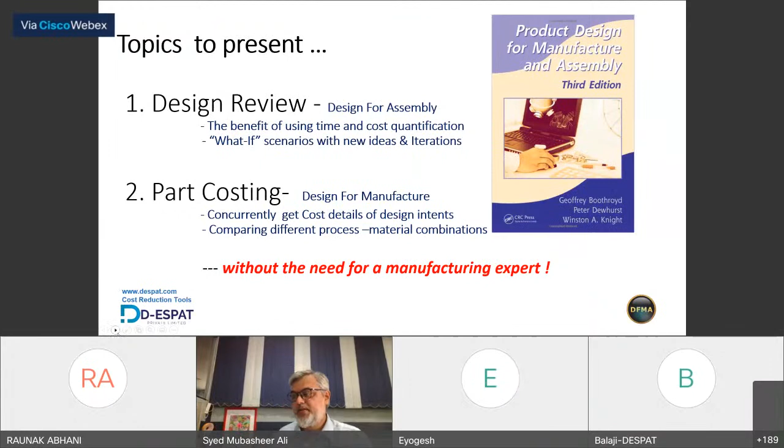Thank you so much. So here's what I'm going to do, and please do have a good look at this tool, this assembly. I think a sample of this assembly video is also being given to you. So for our session of understanding of these 2 tools, I've taken a sample example of a subassembly. This subassembly is called a position sensing motor subassembly that is used in a very large printer. This printer prints things like flex banners and so on. So it is a large printer mechanism assembly.

It actually is like a motor that moves back and forth on a guide rail. Okay, those guide rail that goes through these 2 holes. So what I've done here is I have got this bill of materials which is exploded here for the sake of our faster understanding, and a video that explains how this product should be assembled on the operator's table. So let me walk you through this video.

Here goes. So what's coming up, the blue color is the base in which that yellow color press fitted bush is inserted. The motor is followed with the motor set screw, the motor screws. The red color element is an electronic sensor, which is held in position by a set screw. These yellow color standoffs allow the green color end plate sheet metal component to be placed on top and positioned by end plate screws. That is a plastic grommet which allows the wires to come through. The cover is slid in and the cover screws are going to be fastened.

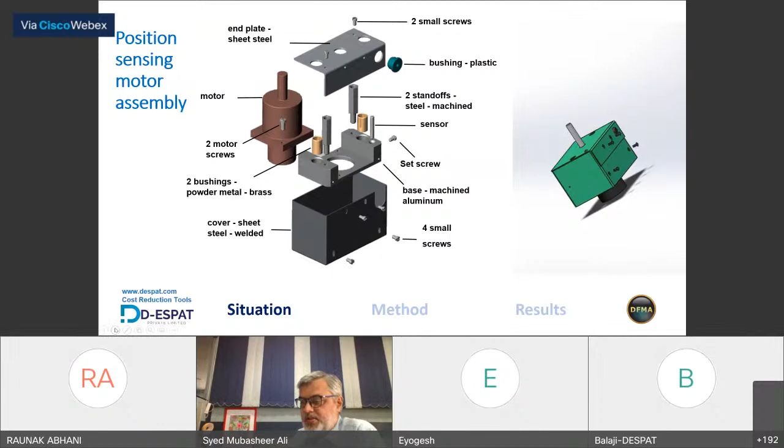I hope this video was explanatory. If you've understood that video, give me a shout out by saying yes on the chat box. Thank you.

So I have taken a few components from this product to bring your attention to understand our two modules to be validated today. So if you see from the video, these two components called the end plate and cover are sheet metal parts. And if you've looked at the video, these are the two components that form the enclosure of this particular product, right? Then if you see the remaining parts that I've highlighted here, except the base, this is not an important component for our conversation today.

The rest of the components, which is the end plate screws, these two numbers, these standoffs, and these four cover screws, what they are doing is they're trying to hold these two, end plate and cover, together. So they're giving the functionality of having them fastened and held in position. You understand? And remember, this is what the product looks like upon assembly, right?

Now, what I have as a question for you folks is, let us say today we are given a challenge. Our challenge is, guys, as a part of your project, please quantify this product design. Also, please find out if you can reduce the cost of this product. Please say if you can do some sort of a cost reduction or make this product more simpler to assemble. I have a question for you guys. How do you think you will go and quantify the functions of these different parts that I showed you in the product? Right? Every time we as designers, we always design a product to serve a particular function, right?

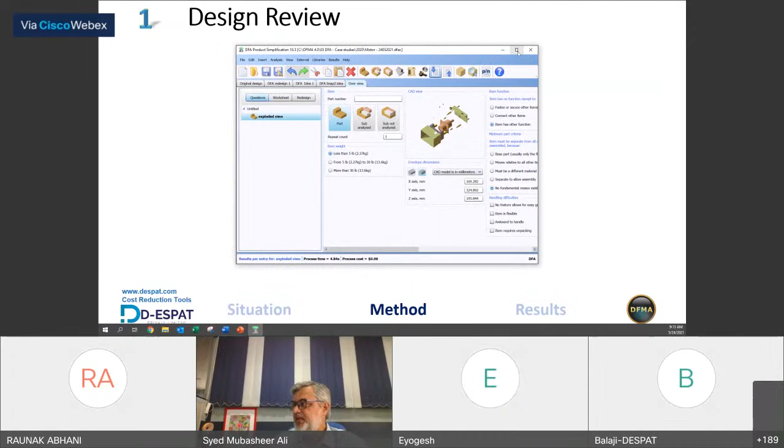So let me take you into that module and let me know if you can see my screen, which says Design for DFA Product Simplification. Guys, I know I want the chat box feedback, but looks like some people are only doing chat box feedback. I want you to get your attention on the screen also.

Wonderful. Okay, so here's what I have of that whole assembly that I've put up into the DFA tool. Rest assured, you're going to get a chance to look at this and work on this after these sessions are over, and we'll give you the guiding user manual and also videos to help you to do that. Okay, so now let's get some attention onto this screen. This is the Design for Assembly product simplification window. And the GUI is a very simple tool. Let me see if I can open up this.

Yeah, it does. So what you're seeing here is a CAD imported version of this bill of materials. Imagine if I didn't show you that video, and if I had asked you, hey, what do you think is the best sequence to assemble this product? You would probably need some time to plan out what should be the assembly sequence, right? So right now we already know what the assembly sequence is from the video that we have shown to you. So let us go and show you the GUI.

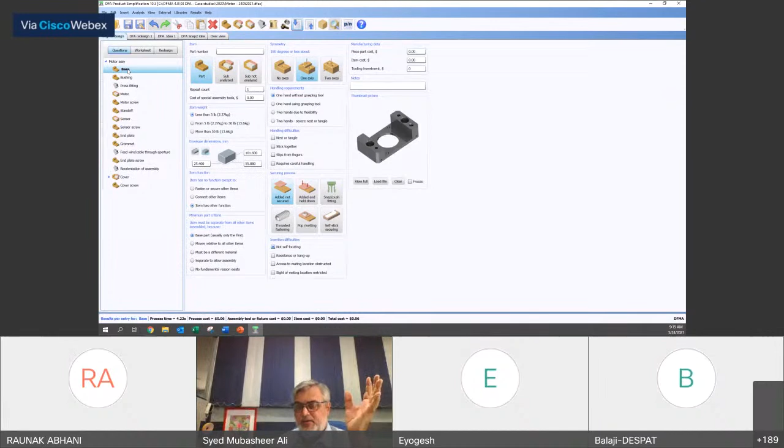The graphic user interface of the design for assembly window has 3 parts. One on the left hand side is called the product structure. What does product structure mean? Okay, one more thing is, if you remember, Balaji talked about secrets. If you see me repeating anything twice or thrice, make sure you note it down. You're probably going to get it as a part of the questionnaire on the 3rd day. It is an objective type questionnaire, but you need to know the answers to get it right.

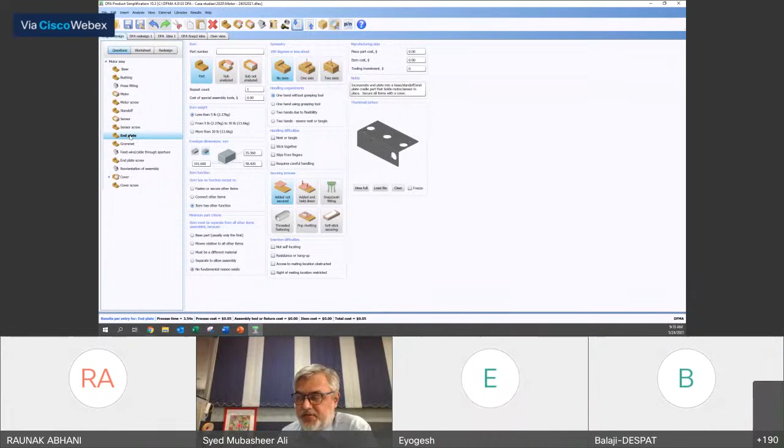So on the left hand side is this product structure. Now, what is product structure? It is the bill of materials in the sequence that you have to assemble this product. Can you see that this left hand side product structure has the same steps that we saw in the video assembling the product together? And for each item on the product structure, the right hand side is called the design for assembly question and answers panel. So this Q&A panel is the heart of the DFA analysis.

Ladies and gentlemen, you don't necessarily have to be an engineer to use this tool. If you're somebody who has a design idea, a product designer, an industrial designer, you have an idea of a product, you can use this tool even at a conceptual stage to get rapid feedback on your design intent. So the third part of the window, apart from the question and answers panel, is at the bottom here: results, which shows the process time and the cost associated with it, and also gives you the cost for the assembly and the item cost, which means each of the components in your design that you have put there.

Okay, now I'm going to do a few steps of this assembly, and if you already have the document from us which says the motor assembly, which has a 3D image, you can use it. If you don't have it, don't worry. Try to recollect from the video and help me to answer these questions. And I'll tell you some of the things related to this window as we get ahead. Is that a fair one?

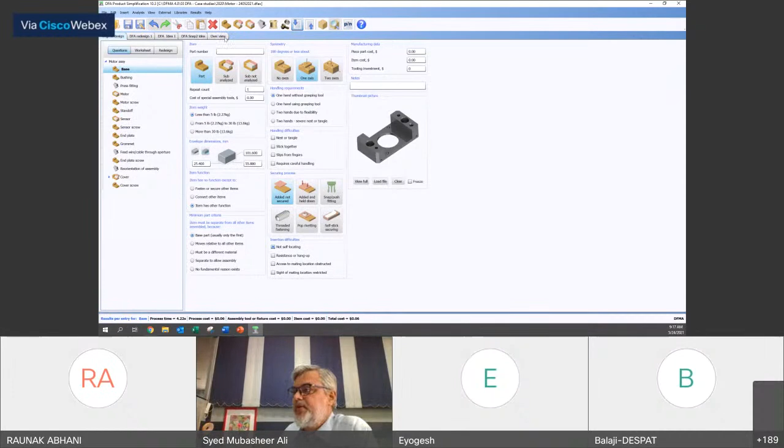Wonderful. So let me insert a new analysis. This is how I probably do this exercise. I'll come back to this finished one, so I put it there. So I'm calling this the motor assembly. I'm going to tell you what these steps mean.

So when I start out an analysis, whether you're going to make one prototype or you want to make a few hundreds or thousands of them, this is an important element called the life volume that you may want to enter in this window, because whatever costs you incur in terms of tools, special programming, consultancy time, and all other incidental costs will get amortized, averaged over this life volume that you want to manufacture.

So make sure you enter this, and it's important, gentlemen, please take note of this, because we're going to give you a singular exercise to be done. When you look at a product and do a DFA exercise for it, you must challenge looking at that product: how many such products should be made if a company has to be successful?

Depending on the magnitude of the product at hand, you should make some sort of assessment within your purview. For example, I've got this marker pen, Faber-Castell, in my hand. If someone asked me to do an analysis, I'd ask how many parts of this should I make. If this was a Montblanc pen, which is expensive, I'd look at it differently. So depending on the kind of product you have, you must make this assessment, or ask your sales or marketing team what the intent is to manufacture this product.

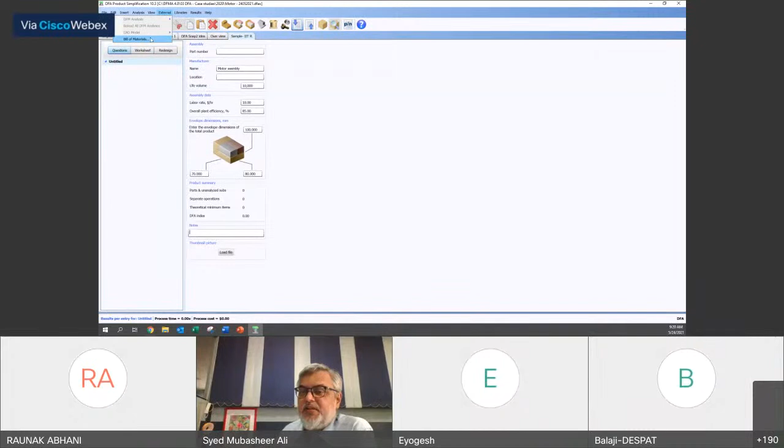This is my first entry, and this is an overview. Over the next few days, time permitting, I'll show you how to import a CAD model and import the bill of materials directly into the tool if you've already done the product in CAD. But today let's do this as an overview from a conceptual level where we have the design at hand.

So can somebody tell me what was the first part in our motor assembly? It was a base, right, if you remember from the video. So I've put that element as base. Notice I'm doing this from a conceptual design stage in this exercise, but I'll show you later the actually completed analysis for the sake of understanding this tool. Thank you, everybody. Understood? Yes. Let's get back to my screen.

When you're given this first element, this question and answer panel is up here, asking if you can define more details related to this component. First it asks: can you describe what kind of item it is - a part, a subassembly, or a subassembly you don't want to analyze? In our case this component is a part, so I'll leave it there.

Second, it wants to know the weight profile of your part - is it less than 5 pounds, a heavier component, or more than 30 pounds? Notice, ladies and gentlemen, that as I click these icons, depending on the selection, the question and answer panel changes.

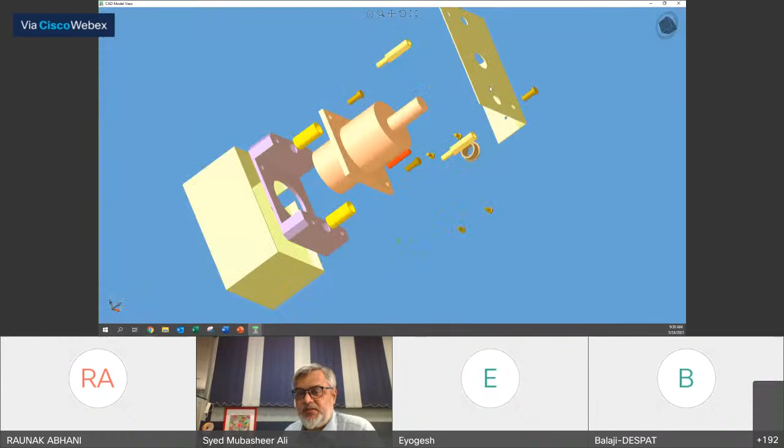If you look at this component, this is a base part, right? Actually, it's quite symmetric if you look at it from one point of view. But from an operator's perspective, if you look at these holes, you would like to bring it and assemble it in one way, so that only then he'll be able to pick and place it. There's also another hole here for the set screw. So the symmetry of this part is that he will pick the component and place it in one orientation, which is in his vision, so he can construct the rest of the parts inside that design.

So the symmetry for this part is that it has got no axis symmetry. No axis means one-way orientation, one-way insertion only. Does that make sense, Soumik?

If it was something like a ball bearing, it would have been a two-axis symmetry. If it was something like a screw, it would be a one-axis symmetry. If it's like a hollow cylinder, it would be a two-axis symmetry, and so on and so forth. I will answer some questions as we go ahead, but thank you so much for asking the question. It's nice to see a lively interaction here.

So what's the second part that we have to add? Everybody is very fast with the base part. Now let us see who recollects what the second part is. It's not the motor. Bush. Yes, thank you, Ashwin, it's the bush. Correct, the bushing is the part.

So let's go and add a part. As you can see, gentlemen, right now I'm doing this conceptually, but I can also add singular parts if I want.

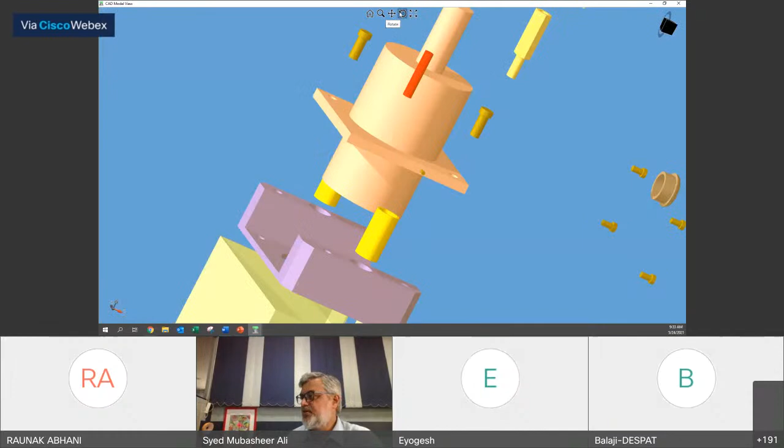You need to listen to me carefully now. This is the bill of materials. Are you able to see? This bushing is inserted into the circular hole. If you imagine the fully assembled product, which I showed you in the video earlier, the guide rail will go through this hole, pass through the bushing, and this whole mechanism goes up and down on these 2 guide rails.

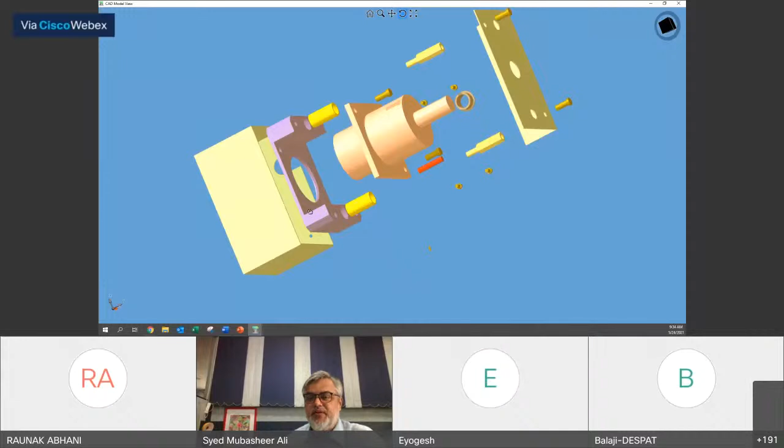This bushing is made of brass, this base is made of aluminum. The reason why the bushing is made of brass is because it's got some good frictional properties. That is why in the initial design they've had this bushing that is press fitted into this product.

Okay, now with that in mind, let us go and answer the questions for this bushing. So the bushing has a function. Now let's answer with a yes related to wear resistance. All right, let me go and answer these questions one by one in a methodical way.

We'll come back to this, Debashish, Yogesh, and Balaji. Please follow these questions. We'll cut, paste, and reply to them as we go ahead.

It is in dollars because this is the out-of-box solution. You can customize it to a different currency as a part of the reporting. Okay, Debashish, it's here - can you see this? Change currency. So we'll come back to that.

Now, is it a base part, this bushing? No. Does it move relative to other items? Absolutely not, because once you insert the press fit into the part, it will stay in position. It's not going to move relative to other parts.

Is the bushing required to be made of a different material? If you think about it, the base was made of aluminium, the bushing is made of brass. So the reason why it is made of brass is so that it has frictional properties that can be utilized for wear and tear. Let's go back for a moment and look at this 3D model.

Okay, look at this 3D model. Okay, now let me ask you a question.

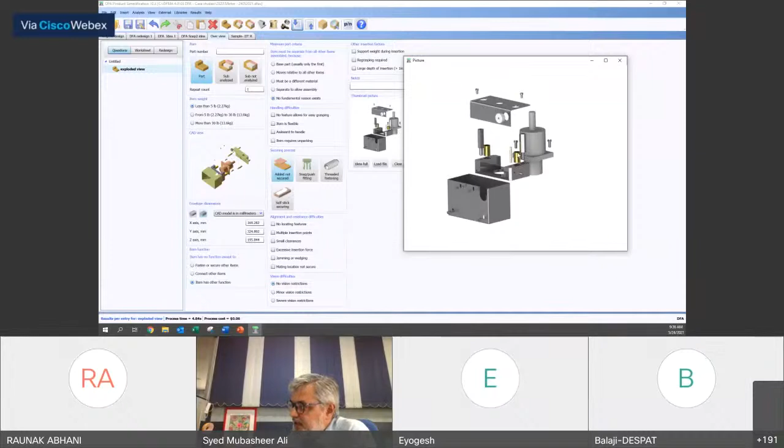I have been given a task to do product simplification. I know there are so many new materials available. Right now this is made of aluminum and this is made of brass, but is that the reason why it should exist? Can this product not work if I do the following? Listen to me carefully - if I machine the ID of this aluminum base as the internal diameter of the brass, won't the function still be satisfied? Can this assembly still work? The answer is yes.

So in order to achieve the functionality of this product, this is not a critical component that should be there. In that sense, even though it is made of a different material, it is still not required, not compulsory for the function to work. So many times we build a product which has such a secondary or tertiary requirement, but not necessarily aligned to the function of the product.

If you want to be a good DFMA person, you're going to critically give this kind of scoring, identifying the parts which are critical for the function and not critical for the function. Okay. So that way, ladies and gentlemen, this minimum part criteria says no fundamental reason exists for that particular bushing. What I'm saying is, even though the component is here in my design, when I'm doing my review, I'm identifying it as a component that is not necessarily required for the fundamental functioning of this particular product.

Now you come to the symmetry of this. I'll come to the fourth option. Hang on, I'll come to it. Thank you so much for asking.

Look at the symmetry of the part. Now you tell me, this is a hollow bushing, right? Like a hollow bushing like this. I'm not sure if you can see, there's a cap of my bottle. So I can insert the bushing like this. I can also insert it this way. So while inserting it this way, I can also rotate it 360 degrees and it will still find its way to insert, which means it is a component which has two axes of symmetry.

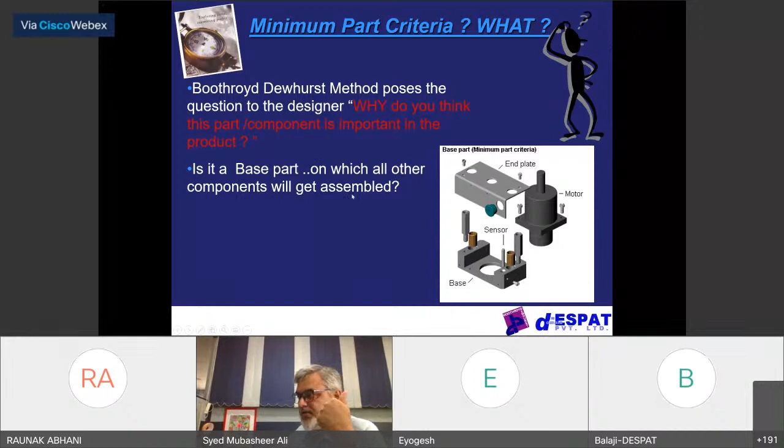Okay, now what does minimum part criteria relevance mean? So the Boothroyd Dewhurst method says to the user, based on the user's perception, why do you think the component is important for the product? This question is something as a user, your perception. So there are 4 different attributes to this. One, if it is a base part, like in this case, on which the components are assembled, then that is option number 1.

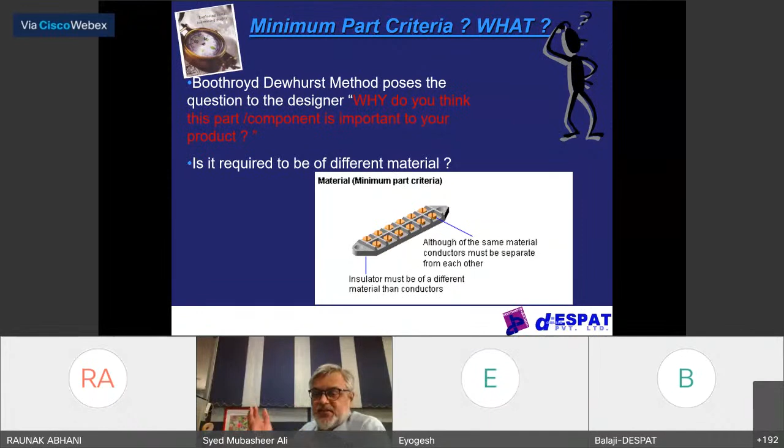Do I need these 2 separate wires with this insulation for this product to work? Yes, I need a positive and a negative wire, then only this product can work. So something like this should be compelling, where the material has to be different. So electrical insulation, thermal insulation, these kind of attributes. Understood? If it doesn't satisfy this, the third thing is it should be probably a component that moves relative to other parts, either more than 360 degrees of revolution or a translatory motion like up and down, where translatory motion is required for the product to function.

Other plastic bushings used above the motor in the assembly? I didn't get your question, Avantika. You want to frame that one more time? See what I'm doing, Avantika, is I'm doing this demo as if I'm reviewing an existing old design. Coming back for the newer ones, I'm going to show you as we make the improvisations. Okay, let me come back to that.

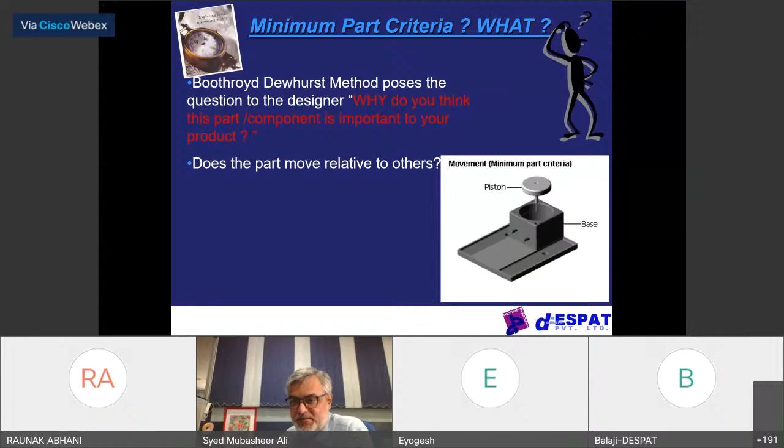And the 4th attribute in the minimum part criteria is, should the component be separate for assembly purpose? These are the 4 different criteria which classify as the minimum part criteria. One is the component should be a base part. 2, it should be made of a different material. 3, it should be moving relative to other parts. 4, it is required for assembly.

What I mean by required for assembly, let me give you an example. The cylinder head of your engine and the cylinder block are both made of the same aluminum alloy. But the cylinder head is made separate so that you can put the piston, connecting rod, gudgeon pin inside the cylinder. Otherwise, if you have it as a singular part, you'll never be able to put those components together. So something like this makes it a criteria for assembly. So these 4 categories form the minimum part criteria question.

If it doesn't satisfy this, then the remaining parts should be viewed as candidates for elimination, as we call it. Under this, as you've already seen, one is fasteners: nuts, bolts, rivets, screws, washers. Second one is connectors, which is conduits, cables, wires, tubes, ropes. And the last one is redundant components. For example, there was a hole. To cover this hole, he's put a plate and put these 4 screws along with nuts and washers. Can we find a way to make it simpler? That is what we have applied as a thinking for the bushing.

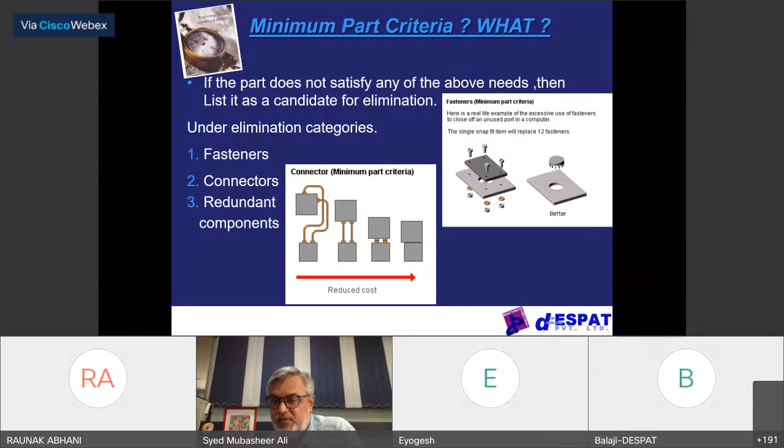Understood? Say okay or understood or a yes in the chat box, please.

Now, let's go back to this presentation for a while. Now, you understood that the motor has 1 and 2, both options relevant, but we are taking the more important criteria for the motor. Now, the next question is, sir, what is the importance of minimum criteria? Where does it impact? See, when you select this option, this gets reflected in what we call the design for assembly index.

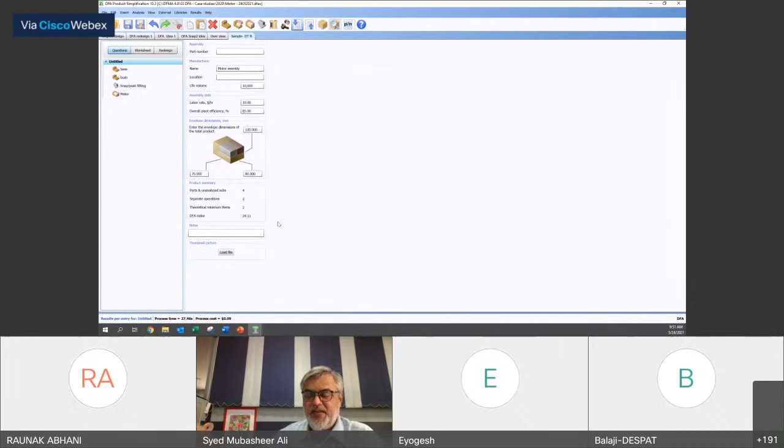See, a design for assembly index is a measure of comparing your design to the world's best practices that is a part of our system. And for the actual time that you have for assembly, for all of these steps that you're carrying out, it gives you an indication of how much it is compared to the world's best practices.

Now, can this be 100%? No. But what is it that is a thumb rule for me to look at? Nothing like that. You make a comparison of your design as you build your product structure, you get feedback. As you keep making improvements, you get different numbers. That improvement of the old and the new, which uses the world standard as comparison, is your reference of improvement. I will explain what I mean as I show you the overview in the next 4-5 minutes. So let's come back to the motor.

I hope we understood the importance of the minimum part criteria. This is very critical for success of your design for assembly review, ladies and gentlemen. Okay. Next, if you look at the symmetry of the motor, the motor has a square-like base. So you could probably rotate it about 1 axis and insert, but maybe there's a challenge with the motor wire. I don't know. So if that is the case, I will say no axis, which is preferable.

What would be considered a good enough index? There's no reference of a good enough index. For a commodity, let us say a computer CPU, the DFA index would be something like 3 to 5 or 7%. For a mechanical enclosure, it could be 10 to 15%. That doesn't matter. From that existing design review, when I make an improvement by a few percent, that is what is important for success. It's relative in itself. Doesn't matter.

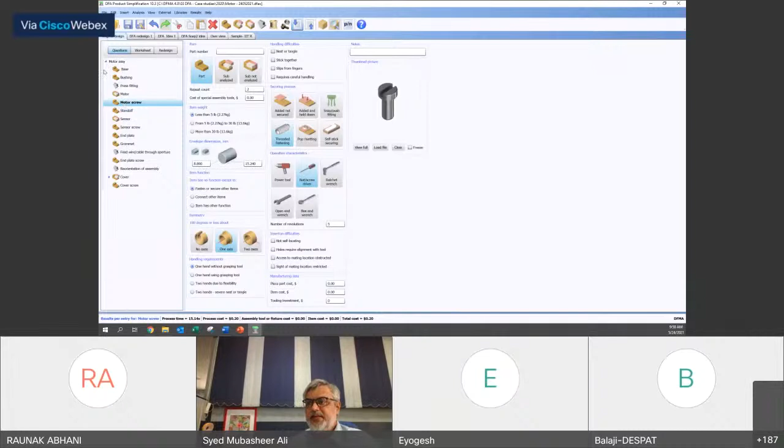So what I've done here so far, ladies and gentlemen, is I have captured these steps of our activity. The only difference that you're seeing in this completed analysis is I have also added the photo of the component here, and I have used the product structure to build this whole hierarchy of the components in my design. Now the next stage is when you have such key steps done, you can review this design.

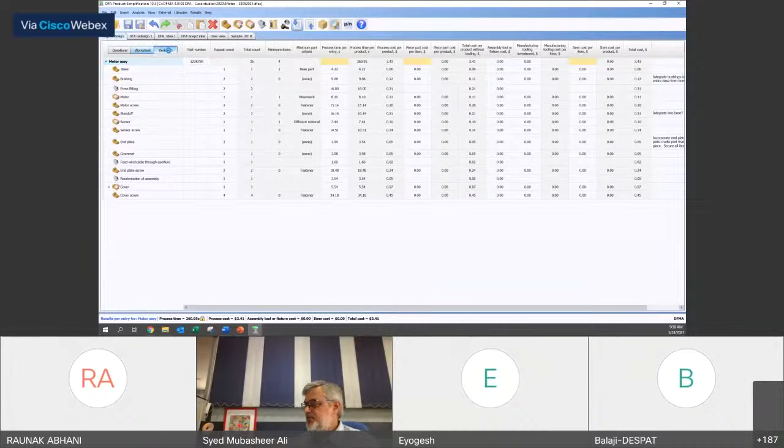Are you able to see my screen? You can review the design like how industrial engineers would do. But more importantly, we have an interesting feature in our software called suggestions for redesign. The suggestions for redesign is a window that categorizes all of the entries that the user has.

Yes, Anmol. What I'm saying is, Anmol, first you build your product structure in the sequence that you want to carry out your review. Like in this case, I have done the assembly steps of this particular motor assembly. Right now, you see, I'm doing an assembly order sequence. For example, somebody could give you a challenge: in the field, like say maintenance of a car, the disassembly by the mechanic is different. So you can do a disassembly sequence also if you like using this tool.

Right now, we have done an assembly sequence of this motor assembly, which forms the full product after you put all of the parts together. What I'm going to use this tool for: I want to use the DFA tool to help me find out where the opportunities for improvement are. I can do that by looking at my product using this suggestions for redesign window. Yes, the hierarchy of the assembly can be altered. The cost will not vary unless you answer the questions differently. Order does not matter. Order is for us as users to understand why we are doing this order.

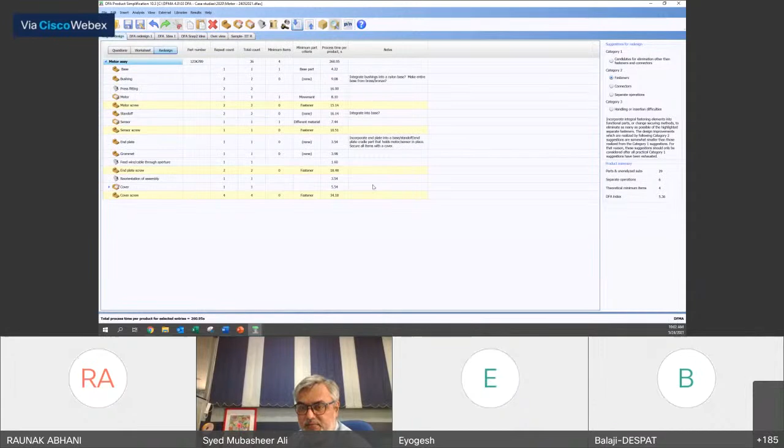Now, if I am a part of a design team that has been entrusted with the activity of doing product design review, I will take my attention to the large time contributors in my design and go challenge and find out what is it that they are doing. Is there an opportunity to reduce and so on and so forth? Shall we do it for the cover screws now for a minute? Yes or no? Okay. So let me park this window here.

Let me close this. Let me go and show you that this is the method that we have done. We had a situation previously. Our situation was we have a motor and I brought your attention to these parts. Now I'm showing you the method where I've done this in the DFA. Now, before I go back to this, let us look at this and ask, what are we doing in these few parts? Now that you have done a DFA review, let us focus our attention on these 4 parts. Just imagine that we've answered the questions for all of these parts also. Okay. What I showed you was a quick demo of the DFA tool.

Now, if you look at this part, you'll see that this end plate, one component, and this cover, the second component, is here. I've also put these 5 other parts, the end plate screw, cover screws. Let us start looking at the cover screws. What is the cover screws there for? The cover screws was there for holding the cover in position, correct? What is the cover there for? Well, this is working in a hazardous environment, so we need a cover to protect this product.

Okay, is the cover the only component that is protecting? No, the cover is protecting from these 4 sides. The end plate is protecting from the top. So in order to do the act of cover protection, we have these 2 parts, cover and the end plate. So is the end plate held directly? No, it needs an end plate screw. Is the end plate screw directly held? No, it needs a standoff.

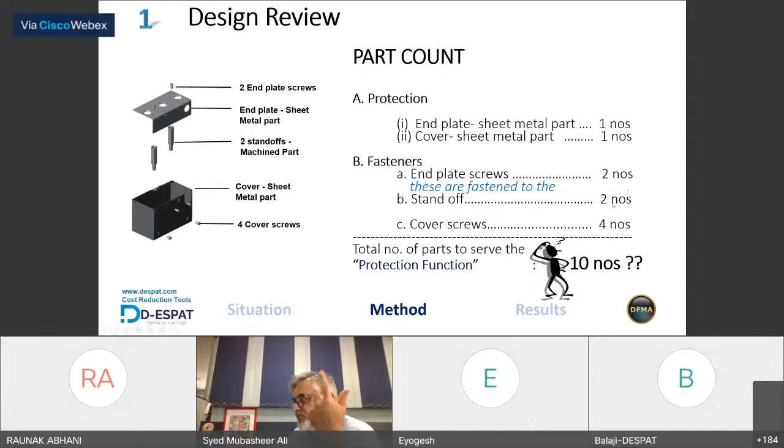So if you look at these 10 parts that I have grouped together, I mean, see, the DFA analysis doesn't happen so easily, but just in the interest of the learning, I've grouped them up to show to you. And I've categorized them into 2 large categories. If I look at these different parts, for the act of protection, we have 2 sheet metal parts, the end plate from the top, the cover from the bottom on the sides. And in order to hold them together, I have end plate screw, cover screw, standoff. Totally, I have 10 parts to do what? To do the act of protection. Come on. This is what I've been able to identify.

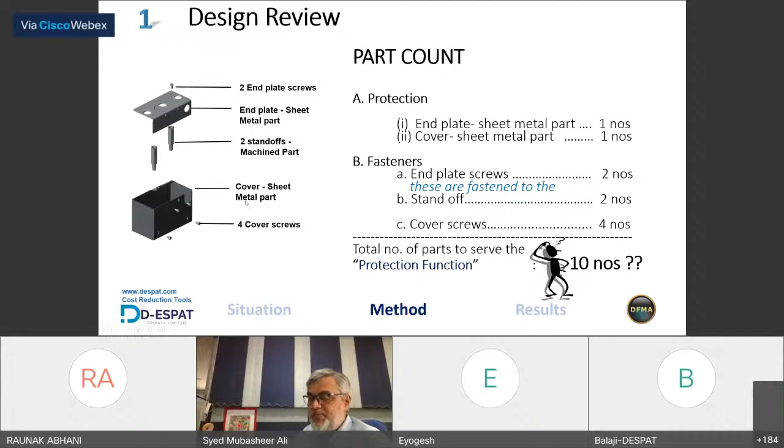And in that, the cover screws is taking about 34 seconds. Now, yeah, we can reduce it. That's why we're going to use the DFA tool. What I'm showing you is the method to this madness of how to do this reduction. So, and remember, do you remember this image? This is what the product looks like when it is assembled, right? Now, ladies and gentlemen, I have some challenges for you.

especially, gentlemen, I'm not looking at you as academic students alone. I'm looking at somebody like you who's going to go tomorrow into an industry and be a part of a design team, where you will be faced with this challenge that when you propose a new idea, your boss, your team member, yourself, are going to say, how am I going to quantify this idea?

If you're part of an enterprise, how do I tell my manager, my teacher, my faculty head: give me the time and the tools and tackle and lab so I can go and validate my new idea? Who should I look out for to help with this validation? Many times, millions of dollars are lost because this ability isn't there. I had a good idea, but there was no time, the project was too heavy, and I forgot about it. Two years later, I realized we lost so much money by not doing that revision.

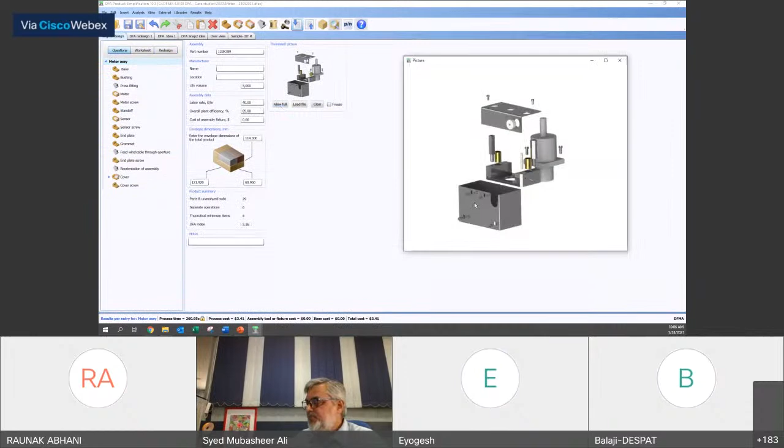When I looked at this component, which had the largest contributor, I challenged it. I did a design review with my team and found it's possible that we can combine these two parts into a singular part, which could look something like this. As I said earlier, this isn't necessarily a CAD image, it could just be a sketch I drew on paper while having coffee. But now I have an idea.

What I can do is use the DFA tool to make a quick review of my old and proposed new idea.

Just give me a second to generate the report. Sorry, not able to see my... Yeah, here it is.

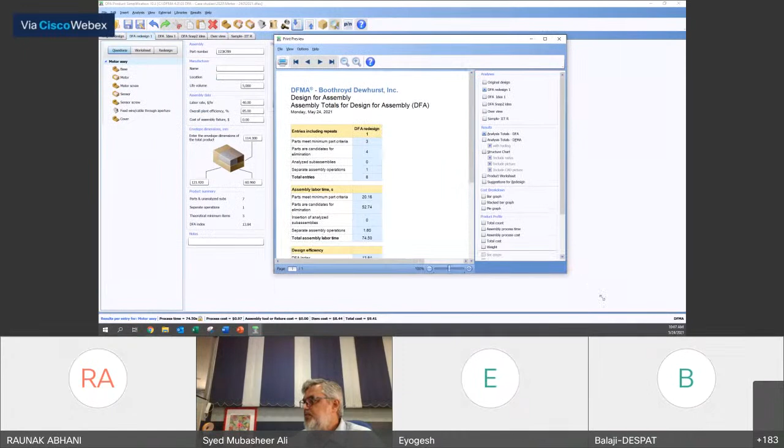Let me maximize this old and new design. Gentlemen, this is our old design and this is our proposed new design. We haven't made a CAD model, we've just got an idea, and from that idea I'm able to create a potential review.

Let me quickly look at some of these attributes. The old design had about 36 different entries in the bill of material or product structure; a potential new idea could just have 8. The old design takes about 261 plus seconds of assembly; our potential new idea could have 75.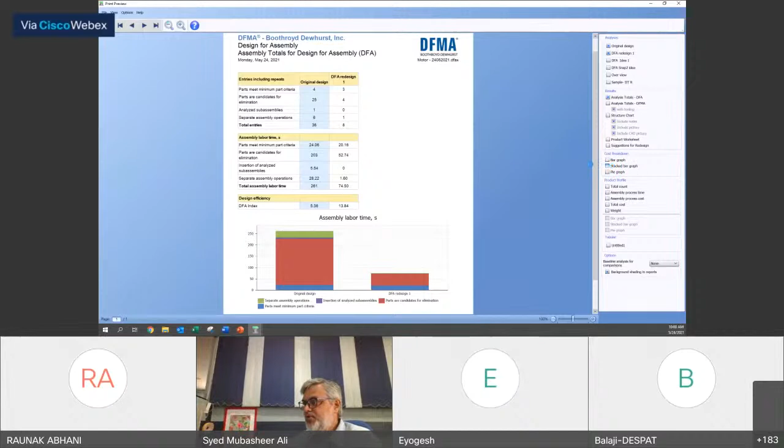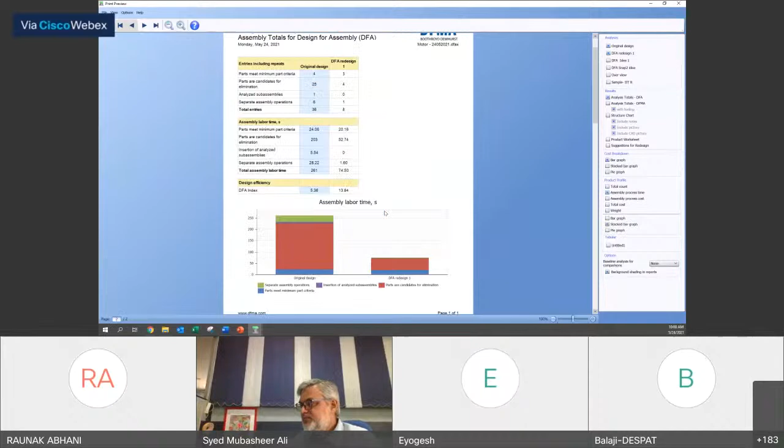I can look at different attributes around this particular product and generate different reports around this. Let me come back and show you the old and new ideas, and look at different other elements of the same product. That's a cost breakdown of my old design and my new design, and this is the process time and process cost associated with it.

Now, what does this mean? I'll tell you in a minute. I want this as a bar graph, not as a stacked bar, it's easier to...

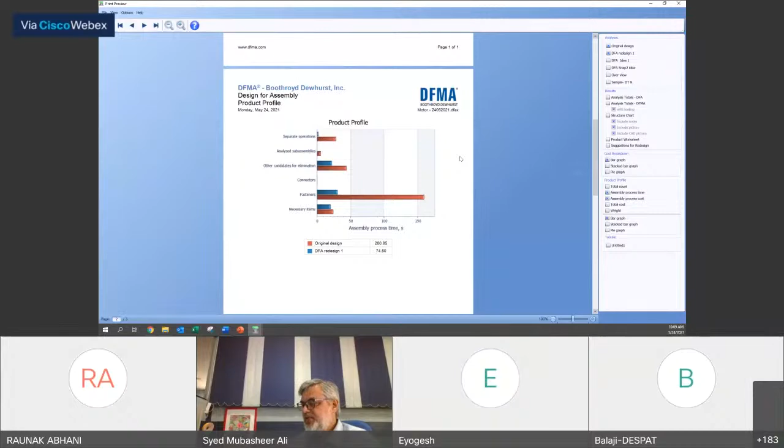What I'm showing you is the latest version of the software, so you have access to this version of the tool. Are you able to see this graph, where I'm talking about the product profile and the assembly time? Let me just maximize it a little.

Now, if you look at this old design, ladies and gentlemen, the overall time for your assembly in the old design was about 260 seconds, of which the fasteners alone were contributing more than 155 plus seconds. Those components which the user, through the minimum part criteria questions, has answered as necessary, are only contributing less than 25 seconds.

With our proposed idea of making a singular cover where we get rid of the standoff, the end plate screw, and the cover screw, we have the potential to reduce the fasteners to something like this, where the fasteners will take less than 30 seconds, and the overall design time can be reduced to 75 seconds. This rapid feedback of your design intent is what the DFA tool helps us to do.

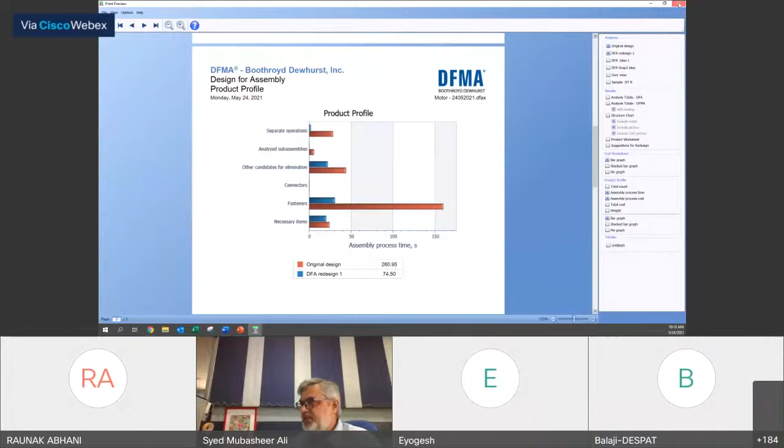Let me generate a couple of ideas for you and talk about those in a minute, in the interest of time. Now, do you remember this motor?

Do you remember the motor's video? It had 2 screws. Let's say if you wanted to make it a foolproof design, wherein in the base you make one chamfer here, so that the chamfer also has the motor. So when you place the motor, only the chamfer can mate with the chamfer of the base, so you can use one motor screw to insert it. If I have an idea like that, how do I validate it?

I can make a copy of this. I will make a paste of the new design. I'll rename it, calling it IITPR Idea 01, in which I'm going to reduce these motor screws from 2 screws to 1 screw.

Now you may ask, sir, how is that 1 screw going to look like? What is the engineering drawing going to look like? What exactly will be the details? You do that engineering part later. But when you have an idea like this, can I get feedback for my potential new idea? That is what the DFMA software can help you to do.

So I'm going to do a quick review of the old idea, new idea, and the IITPR idea, which I just created in the last 1 minute. You see this? The old idea, the fasteners were taking about 61% or $2 cost. Fasteners in the new design is going to be 41%, 0.4. In the IIT design, it's going to be less than 33%.

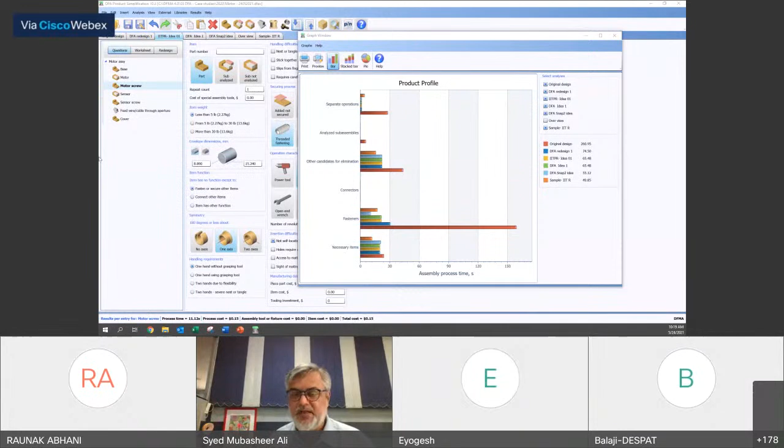So gentlemen, I understand there are a lot of questions, it's nice to see these questions. I'm not sure how to answer them right away, and I'm running low on time, so can I go on to the next part? Yes, you can use the software for designing anything - Formula cars, or anything. We're using this for our own electric tractors that we're doing. Okay, time up.

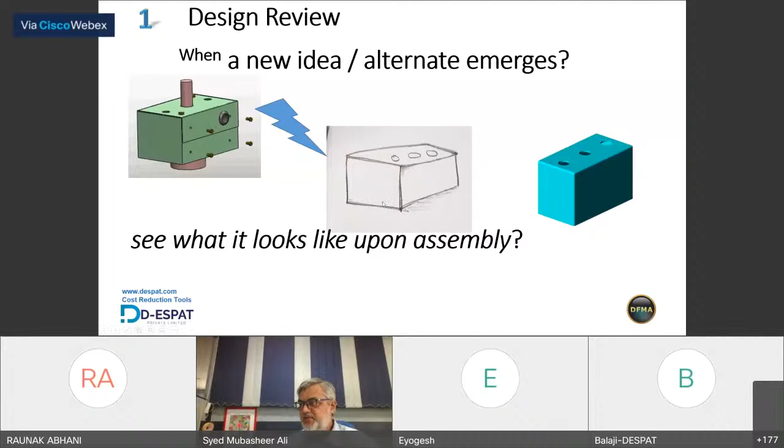Now let me take you to the next part of my story, right? Remember, we have this design. I hope some attributes of the DFA tool have come through to you, which is evident from the kind of questions you're asking. Now, I have this design, and I want to show you the next part of this process, which is focusing on making the parts in the design, for which we will use the design for manufacture concurrent costing tool. With this tool, you can estimate the part cost and also get a very detailed manufacturing review of making that part. So for that, I've taken into consideration this cover - it was something we just now did as a potential new idea. Can we do that?

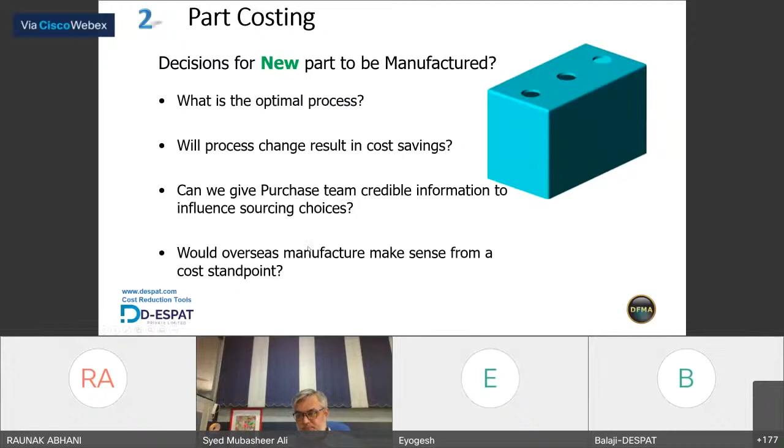Another challenge for procurement people is, should I make this in India? Should I make it in Pune? Should I make it in Chennai? Should I do it in China or Vietnam? So this kind of overseas manufacture review of costing from a cost saving perspective, these are some challenges.

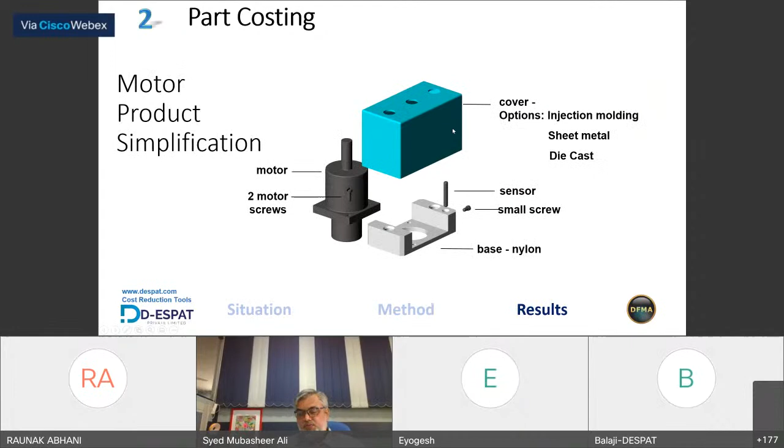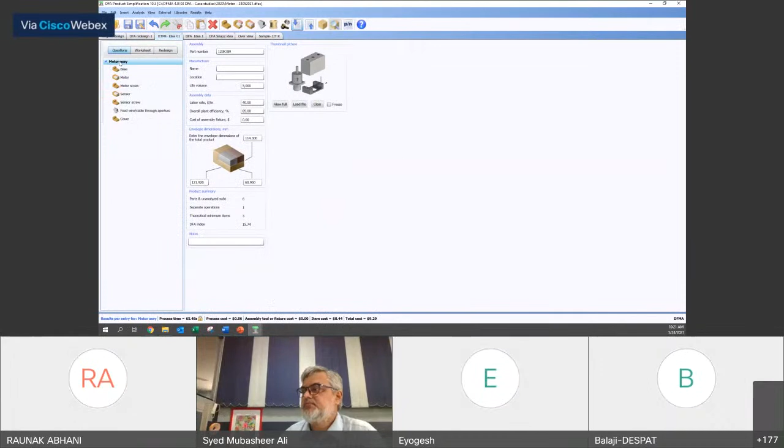I can right click in the DFA tool. I can say do DFM analysis, create a new. DFA and DFM are true concurrent costing tools, so the data from one to the other can be interlinked. So I'm taking the data from the DFA and creating a new analysis in DFM for manufacturing this part. When I do that, the data related to the cover, with the quantity, the name, the geometry details, automatically comes into the software.

Again, ladies and gentlemen, in the DFM tool, if you have a CAD model, you can import a CAD model. But right now I'm going to do a conceptual. I'll show you CAD models later. Let me maximize the screen. So this is the look and feel of the Design for Manufacture Concurrent Costing 4.0 tool. This is the latest version that we have.

When you give the overall geometry of the part, you select an envelope shape and you select this process material icon. What happens, ladies and gentlemen, is you get this process and material selection chart. If you select a process, it'll automatically show you the compatible materials for such a process. Okay, so right now, in the interest of time, I'm going to do this.

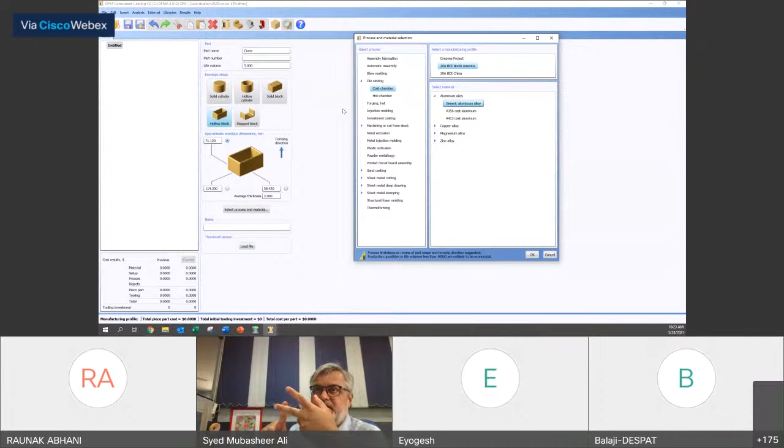Imagine for a moment, this guy called Syed is part of a company. He has got a design from his design team, which has been validated as a good design, an improvement of the cover. So a 10-part cover has been made by the design team into a single-part cover. Now they want to find out, can that cover be made in casting? Can it be made in casting but in China? Can it be made in sheet metal? Can it be made in plastics? This is what I'm going to do in the next 5-10 minutes.

So let me take this cold chamber die casting process. When I selected aluminium, it is saying, if you're taking a quantity less than 10,000, it is unlikely to be economical. Remember our life volume was 5,000, so it is giving me a warning. If you actually manufacture this, the costing may be on the higher side. So the DFM tool, based on the knowledge in its database, will give you rapid feedback on your design intent.

Let me create a stupid situation for myself. Let us think that this guy Syed has done a good design, but he's taken a very large thickness for this component. Can you see I've typed in the value 12?

Hello? Am I only talking to myself? Thank you. Thank you.

Okay, imagine because of some human oversight, some error, this was given as 12. I select this process material selection chart. I select the same cold chamber die casting process. I'll select aluminum. Can you see the warning? It is saying, you've selected a section thickness greater than 11.93 mm, it is unlikely to be practical. Okay, so when I make errors like this, I'm just arbitrarily making a 0.25 mm thickness.

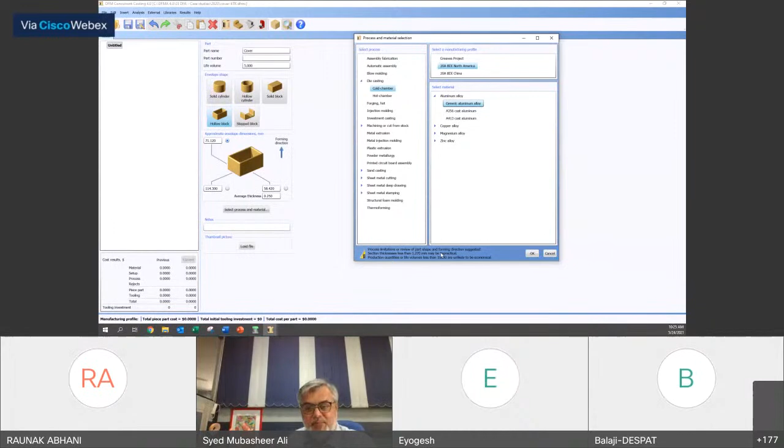If you have less than 1.25, it may be unlikely. So imagine if this was a problem that comes at the production stage, gentlemen. Right? So here in the virtual world, even before I went and designed my CAD part, I have a rapid feedback of my design intent. Are you getting it? This is the strength that DFMA is contributing to the design world, without having engineers looking for manufacturing experts, getting a rapid feedback around their design intent.

And nevertheless, in the interest of time, I'm going to run this a little fast, so that at least I complete the DFM before the 11 o'clock session. So I know I have a 12 mm problem, but I'm still going to take this value just in the interest of this demonstration. I hope that is okay with you. I know that the problem is my quantity is less than 10,000. I know that the problem is we have 12 mm, but I want to review it today. Tomorrow when I go to office, I will talk to my design head, Dr.

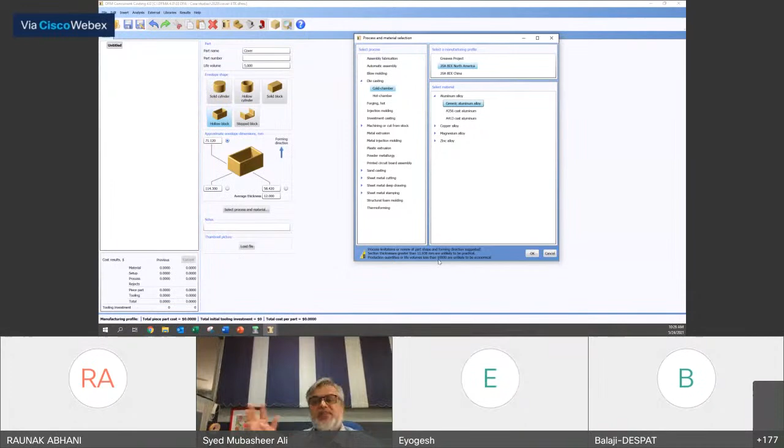Do we have our vendor who can do this part for me or not? I can do these kind of discussions later, but I have this warning already come up, which I will take a note of, and I'll say, okay.

So ladies and gentlemen, what you see here is the process chart automatically generated for the casting process for me. And for each element in the casting process, the data is generated on the right hand side. This is the proprietary IP of our software, which automatically generates it. And what comes at the bottom is the cost impact of your design intent, which is the material, setup, process, tooling of making this part in aluminum with the cold chamber die casting process.

This is the breakup. Then what will be the cost of tooling? It is automatically calculated from the entry that we have given, this overview, which has to be perfected. Now it is conceptual. Remember, you have not given accurate data. The software has made estimates. Another important thing I'd like to show you is this data, which is generated in the DFM, ladies and gentlemen, can automatically come into the DFA tool. What is the relevance of this?

Imagine if my design team is in the US. Manufacturing team is in, say, Pune, Chennai, China, Vietnam, Malaysia. If the DFMA suite is installed on the same server, and my design team, DFM engineers, the vendors, the suppliers, the manufacturing have access to it, then while they're doing these reviews, what is done by one team can automatically be seen by the other in their relevant windows. So that's how we are helping companies world over squeeze their product design cycle by over 50%. Okay.

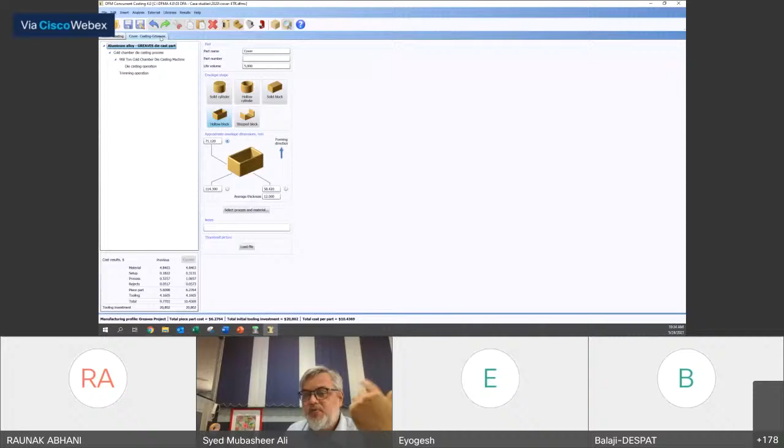So far, I have done 2 iterations of making this component, one casting using a US default database, one using our India customer database. Now let me make another copy and I'll rename this for, say, sheet metal. What if I were to make this component in sheet metal? I'll select this process. You see there are 11 sheet metal processes that are part of our database. Let me select this turret press.

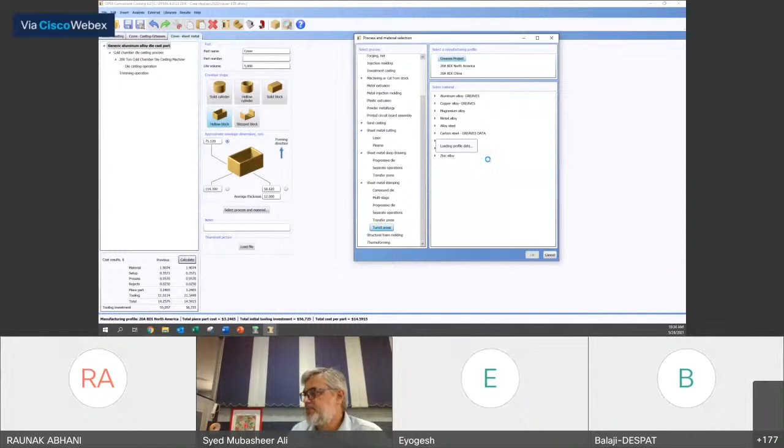Instead of aluminum, let me take a different material. Again, I'm taking a different database here, and I'm going to say OK. So it's going to switch the data from my previous casting to sheet metal. I say yes.

Ladies and gentlemen, do you see the error on my screen? It is saying, boss, Mr. Syed, you've selected a dimension, a thickness of 12 mm, and we don't have in our library a turret press large enough to stamp 12 mm. Gentlemen, imagine for a moment, you did your design, you did your prototype, and let us say at the production stage this problem comes up, what would happen?

Here you see in the virtual world, I've not even designed the CAD model. I just have a conceptual idea for a component. I'm able to get feedback like this. Again, DFMA is not pure science. It's a set of guidelines that have been documented over the last 40 years. So it's not like an ANSYS tool that says, oh, you've not done the mesh properly, you can't do a finite element analysis. These are just warnings. You can say this is not possible, but you can still say okay, and it'll give you the best estimate based on what it has.

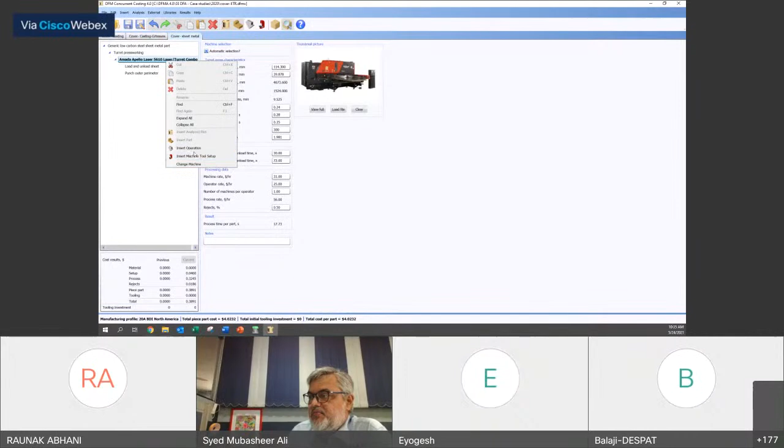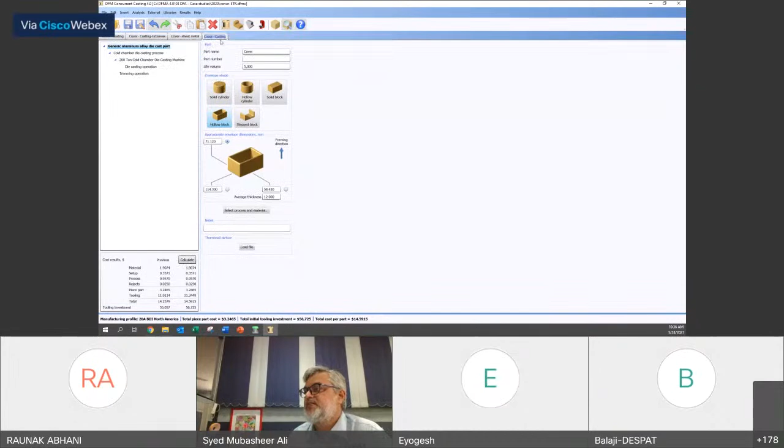You see these machines now in turret press, all of them are showing in yellow. What does it mean? None of them are capable of stamping a 12 mm thickness, but nevertheless, it is taking one of the largest machines and giving you an estimate. Okay, so let me just do one more in the interest of time, and I will rename this as plastics. These are all file names. As you can see, in one DFM file, I can have multiple iterations. And I can have different commodities. When I say commodity, it means a different combination of process and material.

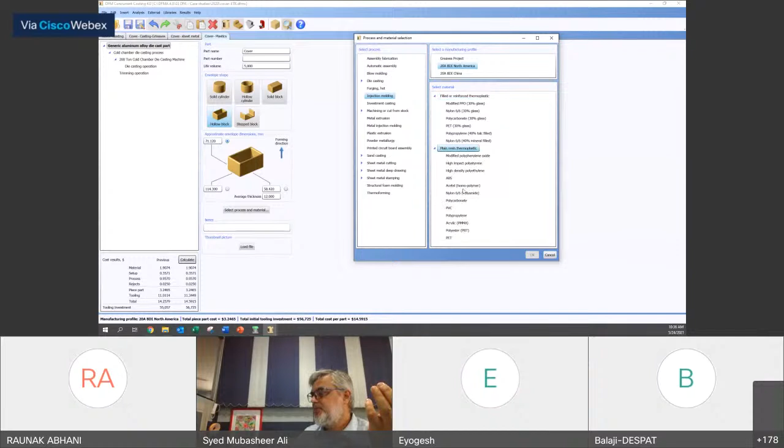So let me take injection mold, and let me take maybe a thermoplastic. ABS is a good engineering plastic. I'll select that. Again, it is showing some warnings. It is saying if you have a section thickness greater than 6.3, it's unlikely to be practical. You have a volume less than 10,000, you have only 5,000, it's unlikely to be economical. Nevertheless, I'm doing an apples to apples comparison here. Let's say okay.

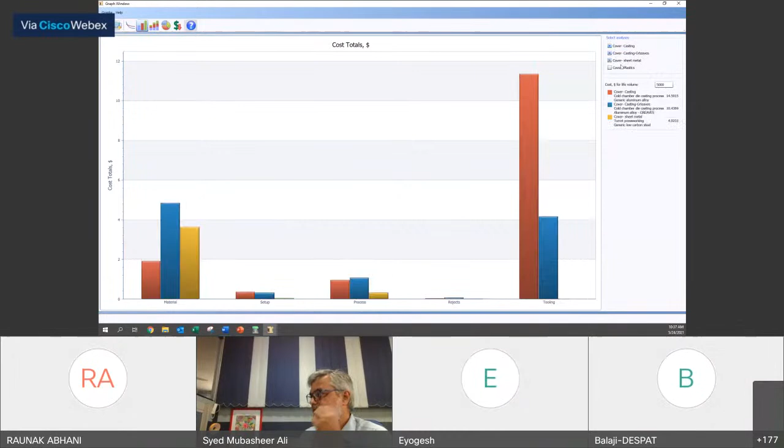So do you see that in about the last 10-15 minutes, one given model we had, and we've done 4 different iterations of commodities. Since there are too many numbers here, let me report all of them on a single dashboard. Are you able to see my graph? Okay, so at this moment I've done 4 comparisons. So for a given life volume of 5,000, the material, setup, process, and tooling for each of these processes.

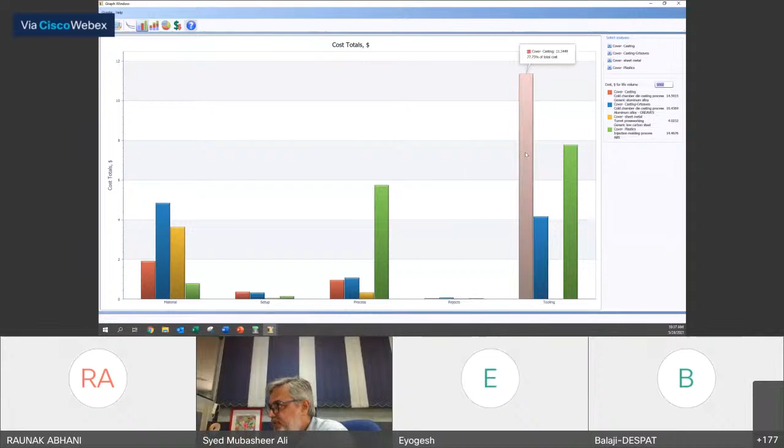If I go on a process, it is showing you how much. The red color refers to the die casting with aluminum. It's saying 75% or 11 rupees is the cost of the casting. For the blue process, it is 4 rupees. There's no tooling for sheet metal. That's why it is almost 0. And the green color is related to plastic. So I can see a breakup like this: material, setup, process, tooling, or I can see it like a stacked bar graph. So the blue color represents tooling here. I can look at it as a pie graph.

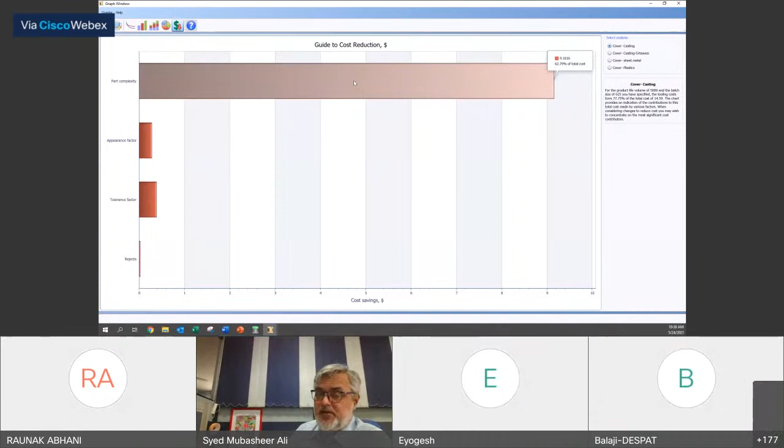If you're a manufacturing expert, you can look at this feature called cost reduction guide. What this does is if you're a manufacturing expert and you want to tell the design team, hey guys, you've done a very complex feature. You've selected a very odd thickness of 12 mm, and that is contributing to the cost of manufacturing this part. This is a tool that manufacturing experts use for having a discussion with their design team.

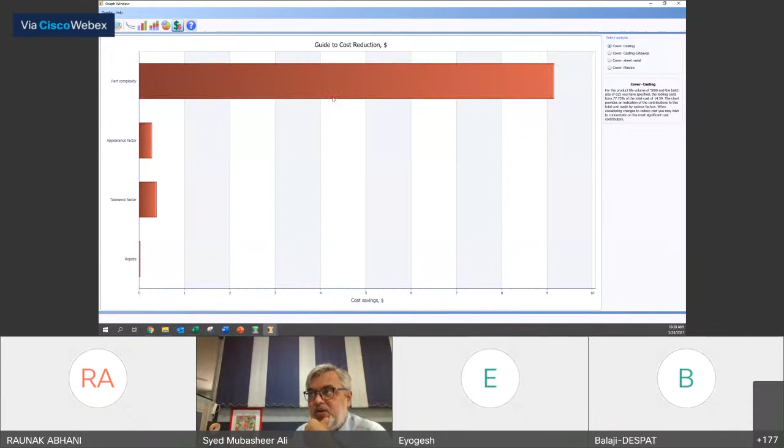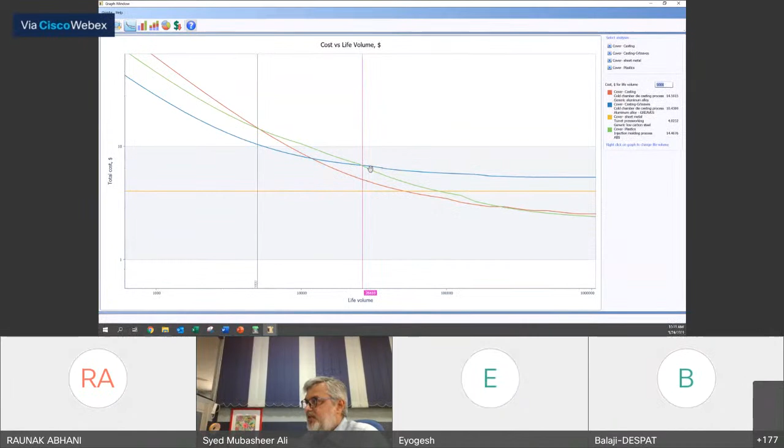Let me magnify this. Can you see this? I'm magnifying it. Let me bring it to the intersection of the blue and the green line. Blue line represents Greaves, which is made in Pune, and the green line represents plastics made in ABS. I'm clicking on that. I'll say 5,000 se hoga nahi, sir. If you give me 25,000 pieces, I will match casting of aluminium to the price of plastic.

Gentlemen, what I showed you just now in the last 10 seconds, this takes days, if not sometimes weeks, depending on the complexity of the product. This is what the DFM tool can do. We'll touch on all of the modules as we do hands-on tomorrow. But what I want to do in continuation is, I have done an overview of making this new design, and I've given you an overview of making them in different commodity combinations and getting a right estimation of cost. Does this impress you?

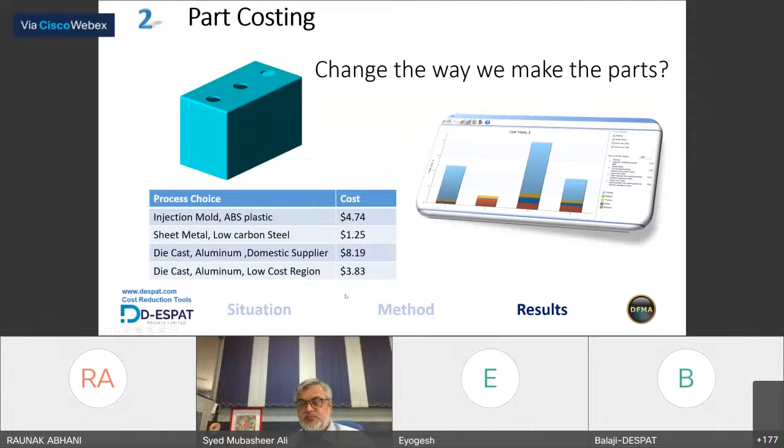Okay. So in a nutshell, when you do this approach to your product or projects, gentlemen and ladies, what you can do is you can look at a holistic review of your product. Yes, it is a very powerful tool. That's why it is so expensive, so well defined, and used by some of the most successful companies in the world. We have seen almost bankrupt companies deploying DFMA and making success stories out of their products. I actually sat through one full presentation on a day where such companies have turned around their whole business model because of reviewing their design and making much more elegant and efficient products.

Let us talk about our product today. What we have been able to do, ladies and gentlemen, is look at our product, and this will be an estimate of what we have been able to achieve today in the percentage of parts that we have reduced, because of which the number of vendors we have removed, because of which we have reduced the number of drawings, because of which we have been able to get the reduction in the assembly time on the shop floor. Remember, you had 260 seconds, now you got about say 70 seconds. In the same shift, your operator can assemble 4 times more products compared to the previous design. And for the company, if you're a part of a company, this is the overall reduction that you're able to get on the product.

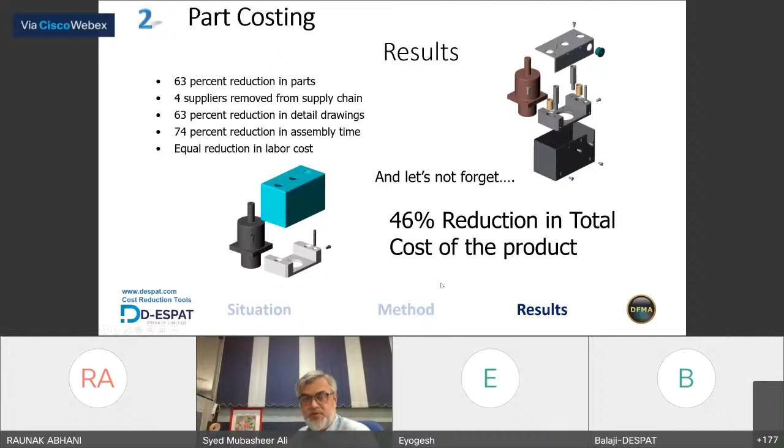So guys, when you start out your exercise of doing a product design, please choose the capabilities which are there within your design community. I mean, let us say you're going to do a project, which I'm sure Dr. Dheeraj will give you as you group up. So within your team, what can you select as the possibility of looking at your product for simplification? That should be done wisely. With over-exaggeration of expectations, usually we've seen not much success. But there are two further attributes.

If you only look at the part, like I did now, which is part level costing, it is a small to medium effort. I look at the cover: what if I cast it, what if I do plastic, what if I do sheet metal? Small effort, small benefit. Okay, large effort means look at the whole product. You remember the first part of my presentation, 10 parts are there. What are they doing? What is the cover there for? What is the attribute? Can I look at it differently? Can I make it a little better? This approach takes more effort, but this approach also has the largest amount of savings. If you look at DFA and DFM, DFA is the cake, DFM is the decoration and the cream and the icing on the cake. Understood?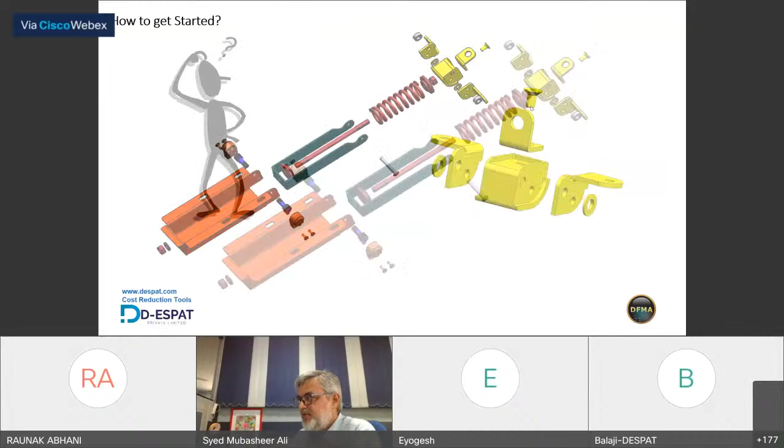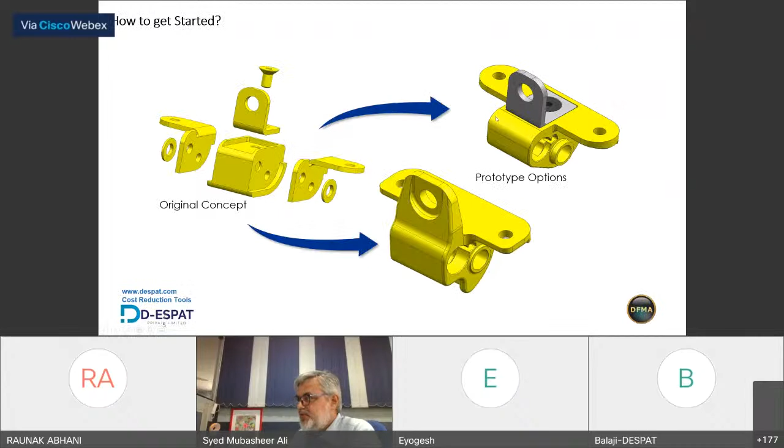I have an example of a hinge assembly here, ladies and gentlemen. Now, if you look at this product and look at the bill of materials, if I want to analyze, I'm looking at the low hanging fruit, which is the head assembly of this hinge. This is a 1, 2, 3, 4, 5, 6, 7 part assembly. If I sit down and brainstorm, I can probably come out with ideas that can make it a simpler 3-part design or a very ideal 1-part casting design. Normally in the industry, people would go and start making prototypes of their proposed ideas, right?

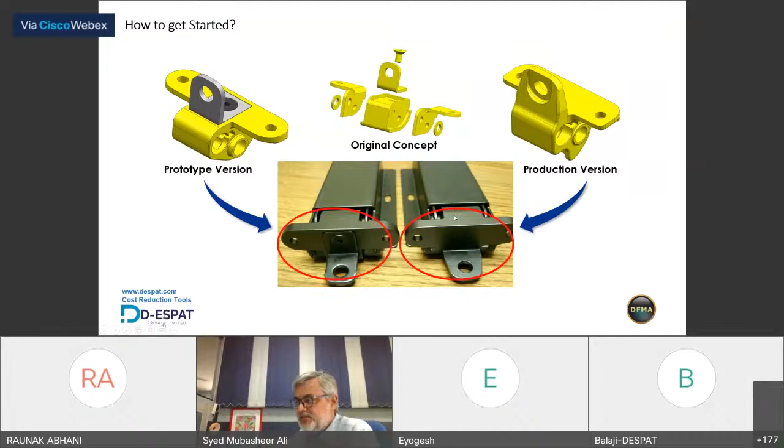But what I'm saying is, hey, here you've got a tool which can help you to scientifically measure your existing product and your potential new final designs of your different ideas, and get a validation of your potential in terms of cost or time reductions. And of course, you're not part of the enterprise, but if you're a part of a company, it is important that you can also figure out what is the benefit you're going to bring for the company. Because only when you project this, based on it, you can ask your company managers to give you time, money, free time from your regular work to concentrate on developing this product. Otherwise, how are you going to even investigate? Isn't that realistic? You understand what I'm saying?

That is why it has become imperative that not just your design team, but your procurement team and upper management team can all be involved in saying, hey, this product looks worth investigating, and we have seen upfront validation of the potential. So for that potential, here's the time allocation, here's the money for the prototype, here's the people you want to engage to work on this project, and these are the things required to investigate in the DFM.

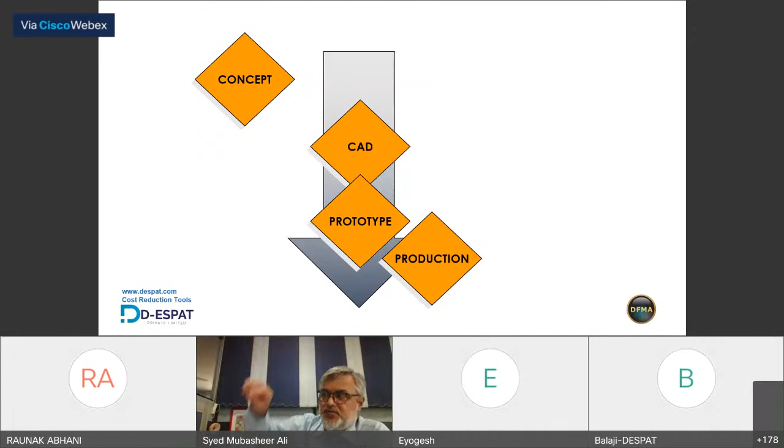Somebody asked me this question, coming back to the innovation happening in the business industry today. Why do you have to have a new idea? Why make a new concept? Why validate a previous design? Basically, you want to be number one in the business, or maybe you're catching up. You have a better idea, you have better technology. All of this leads to companies generating new concepts or potential new ideas.

Most times, what happens is they'll just go ahead and start generating 2D models, 3D sketches, finite element analysis, and so on, until the prototype is ready. And when it's ready for production, that's when the bottlenecks arise.

Remember our DFM, when I put 12 mm, they'll say, Mr. Syed, how come you specified 12 mm? You didn't speak to me. How do you think we can cast it? The biggest thickness is 11 mm. So usually there's a break in this understanding.

If you have an early manufacturing analysis tool like DFMA, you can move this peak period of problem resolution from the early stage of production to the early stage of product design.

Now some people may say, sir, there's already a company, they already have a lot of CAD models, they're already doing the work, they're already making money, they're profitable. Yes, most of our customers are using DFMA when they have a good amount of engineered CAD data, and using DFMA at this stage to see where there are pockets of improvement.

For example, that bushing - what if the bushing is not there? Why make it out of aluminum? Why not make it out of nylon? Why should the cover be two parts? Why not make it a single die cast part? Why don't we make it as a singular injection molded part?

That's how design DFMA is helping companies improve their launch time by over 50%.

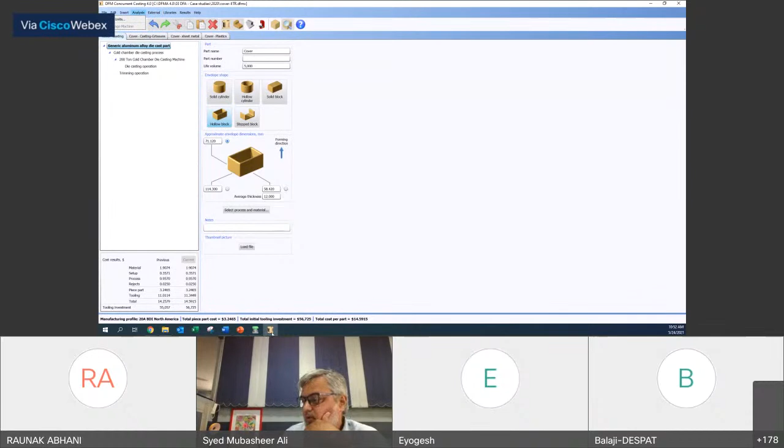No, 3D manufacturing is not there, Jashan. You can build customized user processes. If you're seeing my screen, you can build - sorry, where's that? You can build user processes. If you're seeing here, user processes, custom user data - you can build 3D data.

We have done this for FRP for some aerospace companies. They own the design, they own the proprietary database. So you can use this tool as a platform to build this data. You can build customized data for 3D manufacturing. You can do customized data for different equipment.

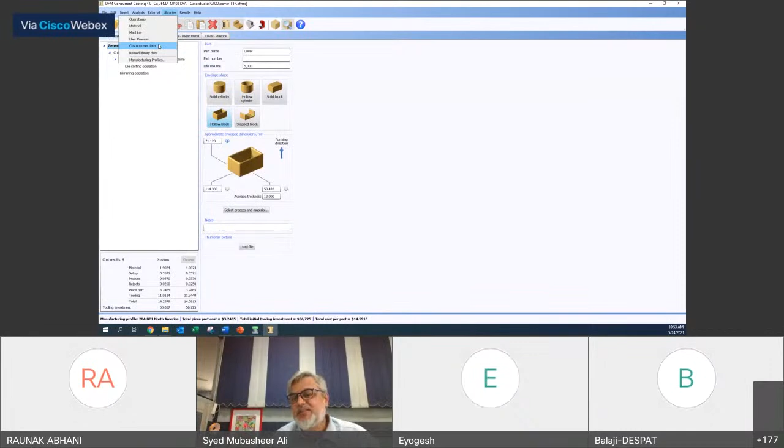It's possible. Can DFMA be able to suggest manufacturing? It will not - DFMA will not suggest a manufacturing process. You select a process, it will tell you the outcome. If you remember, Ashirbad Sahu, if the software becomes so intelligent that it can suggest the process and available vendors, trust me, when you finish your education and come out of college, you won't have jobs. As a matter of fact, I also don't have a job, because the CEO of the company will be able to run all of this automatically.

Thankfully, today that doesn't happen. Does it use machine cutting algorithms? No, it doesn't use... yeah, machine cutting algorithms are used. Good question, I'll take a minute to answer this. Let us say if I have to do a machine tool setup - I didn't do this as a part of this.

Please watch my screen. I'm just adding this in the interest of time. In the interest of this question, please look at my screen.

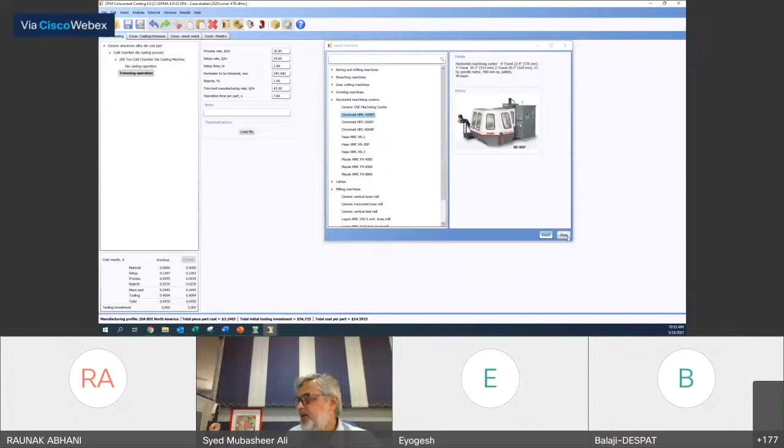Let us say I added a machine. All of this machine is coming from my library. I already showed you that. I have 3 types of libraries - we'll talk about this tomorrow - machines, materials, and library operations.

Okay, machines I showed you earlier. If you see materials, okay, so these are materials. If you select materials, there are subcategories under materials. For each subcategory, it will tell you what processes it is suitable for.

And for each process, ladies and gentlemen, the variables are calculated and kept in the database elaborately. So you don't actually look at all of this, but if you're interested, you can go and review this. Remember, we were getting this practical limits warning that all comes from this library integration. Like that, you can go and build your own, insert your own category of a new material.

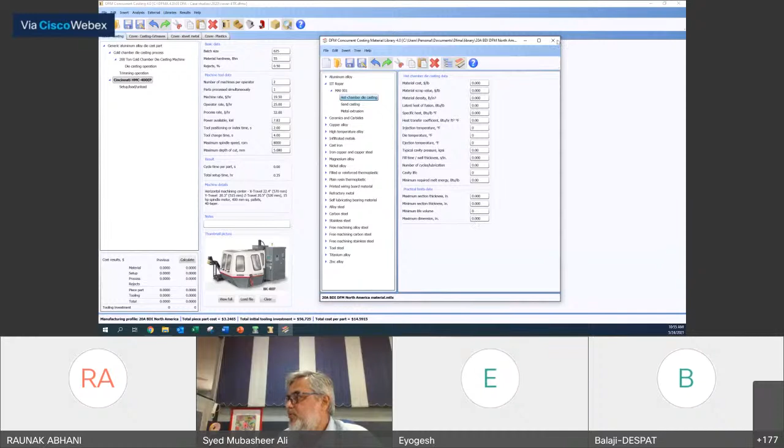And add your own new materials, and you can select what process it is suitable for. And for each process that you do, you can go and key in the values. You can do this. Anyway, I'm not going to look at this now. Similarly, you have even for operations.

Let me come back to that in a minute. Let us say I have this machine. So the machine's operating rate, its machine power, the spindle speed, all that is automatically brought in from the database. Are you seeing this?

Let us say I go to add one operation. I'll add a single operation. I have 6 minutes, so I'll just take a simple operation of drilling a hole. Look at this - are you able to see my screen, gentlemen? It says drill a single hole. What it wants from the user is length of the hole and diameter of the hole.

Let us say length of the hole is 15, then the thickness of the material was 12 mm, so I'll say 12. So I give these two variables. If I calculate, you see, it is giving me the cost for drilling a single hole. It is telling me how much material is removed, what is the time spent for the operation, and how much spindle speed is required. All of this can come from the software.

Now let me come back to the ML algorithm suggestion. If you see these variables, you see 1, 2, 3, 4, 5, which are editable - 6, 7, 8, 9, these 4 are not editable. This is editable, and about 11 variables are shown here. Can you see that, yes or no?

Thank you, Saurabh. Looks like I'm the only one seeing - nobody else is seeing, I guess. Just hang on, Ashirbat, hang on.

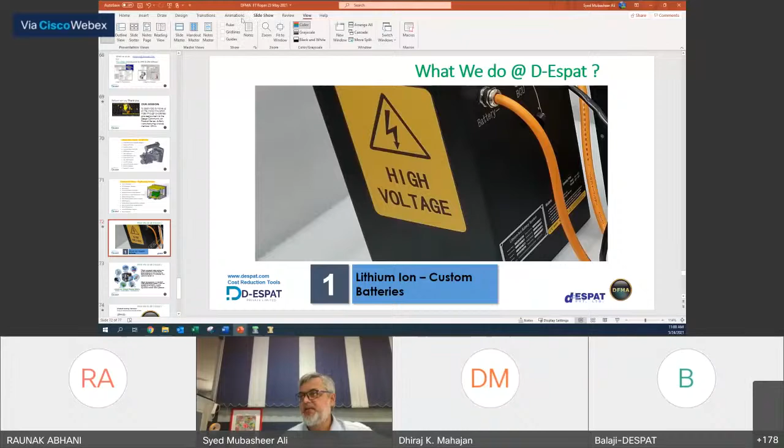I want to just end by telling you a little about us. There are two things that we do. Actually, three things right now. We build customized lithium-ion batteries as a part of our company D-Espat. So if any of your projects have EV racing, electric aircraft, drones, underwater marine, submersibles, military grade products, or medical devices, please feel free to talk to us. We'll be happy to help you by being a part of the project.

When I say help, we are an MSME company. We can probably be the battery partners. We've been doing this for the last 20 plus years. And of course, you already saw our introduction today about DFMA. What we're doing for the industry is we help companies with their product design review and actually help them build a better product.

There'll be enough for assessment. Will we be provided? Yeah, we've already been provided material, Abhishek. Not only is there enough for assessment, you can get more if you want, but if you want enough for assessment, that has also been facilitated. So you can look at it, Abhishek.

The other thing, ladies and gentlemen, I've been doing with my equally crazy set of partners is building an electric tractor, which is one of its kind in the country. It's my startup from end of 2019 called Cellestial E-Mobility. If you go to YouTube and look for Cellestial E-Mobility, you'll probably find videos about us. We actually launched this product on 11th March, and 5 days later it was lockdown. But we have been doing a good amount of testing since then. I'm not sure if you can see this, but I'm going to play it.

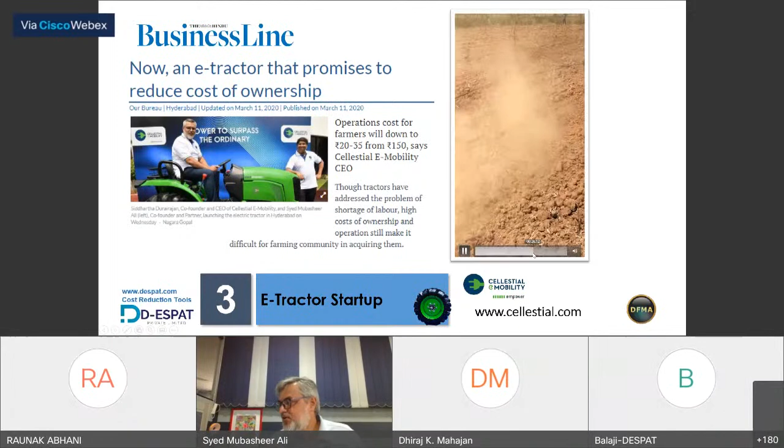This is of the rotavator, not of our electric tractor. I understand that this is a division related to innovation in agri and water. So if this is of interest to you, we'll have to talk about it some other time.